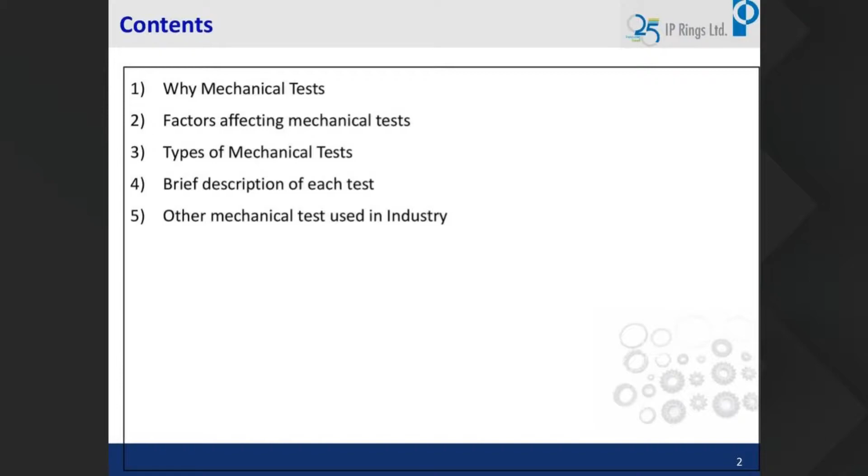Then, what are the factors that affect mechanical tests? What are the types of mechanical tests we have, description of each test, and also the other mechanical tests that are commonly used in the industries.

So if you see in the new product development stage, we will be getting some drawings with conventional materials, and also some drawings for new requirements with new material grades. When we get a new material grade at the time of development, which has not been developed so far in the organization, we will be studying in depth the mechanical properties of the material, to ensure whether the final product that goes to the customer meets the requirement, and also to ensure that if there's any failure in the process, which I will cover in future slides.

So the basic requirement is the mechanical testing. Then comes the metallurgy, the microstructure, and other things. From the mechanical tests, you can arrive at certain conclusions on how the material is behaving.

Then, once the material has been developed, when you are productionizing in regular production, there's one thing called incoming inspection. In any industry, we have incoming inspection, especially for raw material. Once the raw material input is good, naturally the output product quality will be better. So that is why in all industries we institute incoming raw material quality inspection.

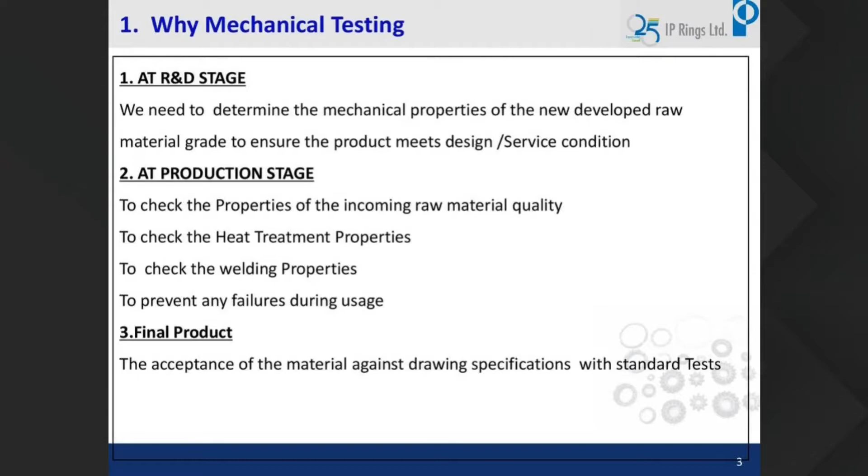In order to evaluate whether the final product is meeting these requirements, it is a must that the drawing mentions the coating thickness and mechanical properties of the coating like hardness. This is mandatory to be spelled out in the drawing, and we also have to provide the test certificate to the customer. Nowadays it is becoming mandatory that without doing any mechanical testing, the product cannot go to the customer.

Hello, yeah. Are you able to hear me? Clear here madam, no problem. Okay, because Vadivel is not able to hear. Can I proceed? Yes ma'am, please proceed.

The various types of material testing: we have two types, destructive as well as non-destructive. In destructive testing, the basic one I told you is the hardness requirement, where some indentation is formed, which again the customer will not accept. Tensile testing of course involves breaking, there will be a breakage in the sample specimen. And the impact test also involves breakage.

So all this falls under destructive testing. Some of the non-destructive testings are MPI, dye penetrant, eddy current, and radiography.

Non-destructive testing: at IP Rings, we manufacture piston rings as well as differential transmission gears. For transmission gears, non-destructive testing is mandatory because after heat treatment, transmission gears, which are usually low carbon steels that are case hardened, need to be checked. MPI and eddy current testing are facilities we have in-house.

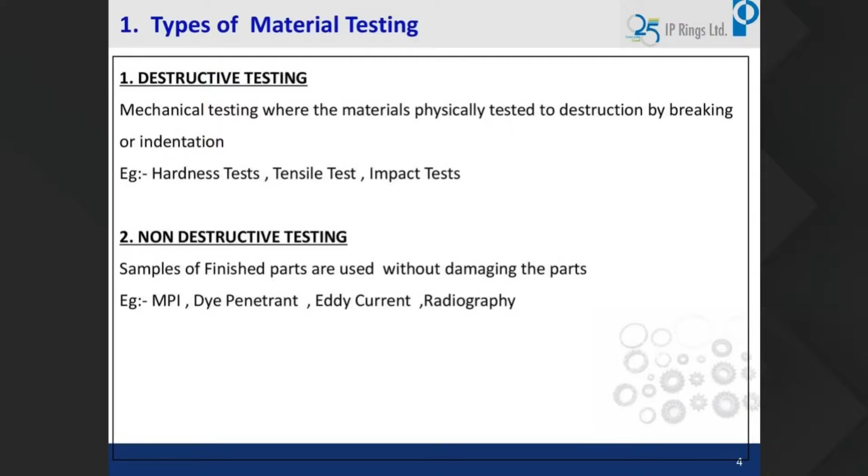Next, what are the factors that affect mechanical properties? One factor is the chemical composition of the material. The chemistry plays a major role, and also the bonding—whether covalent or ionic bond—also plays a major role in determining the mechanical property, along with the crystal structure.

Looking at crystal structure, whether BCC or FCC—for differential gears, we procure hot rolled bar from the steel mill Vardhman. In the hot rolled condition, the microstructure will be ferrite and pearlite. Once case hardening is done at the end of product formation, the microstructure converts from ferrite-pearlite into martensitic structure, which is body centered tetragonal (BCT). Based on that microstructure, there's a difference in mechanical properties.

Apart from that, the extrinsic factors are sample geometry, sample preparation, and machine equipment. All machines nowadays have to be calibrated before use, whether we are using a simple hardness test. Every day we do calibration. At IP Rings, we have instituted a chart, and every day our operators or inspectors check it as a standard practice.

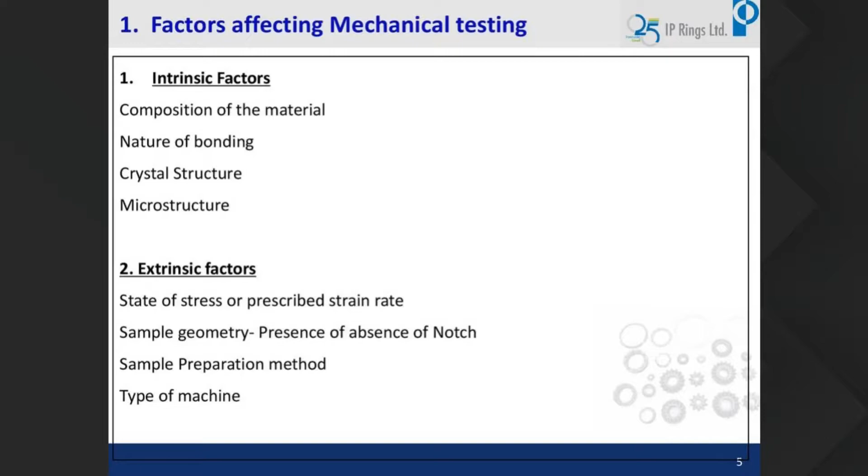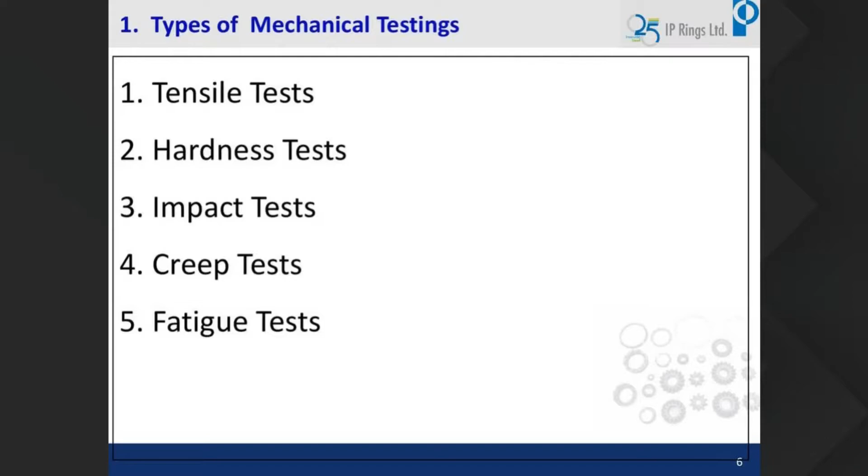Next, some types of mechanical testing are tensile test, hardness test, impact, creep, and fatigue. I will touch upon only tensile, hardness, impact, and fatigue, because creep is for high temperature products like titanium, which we don't generally use in our industry. So I'll mostly cover tensile and hardness, and we mainly use hardness and fatigue testing. Apart from that, there are other simple tests we do in our factory which I'll share.

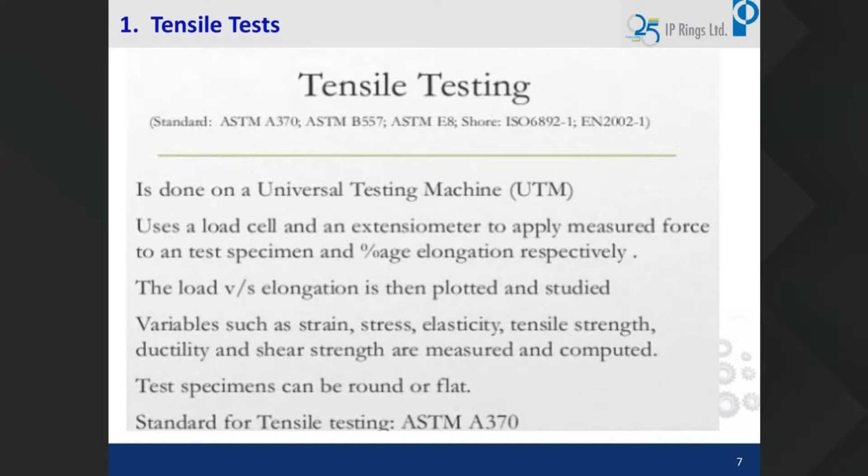Next, the theoretical part. When we talk about tensile testing, the basic thing that comes to mind is the stress-strain graph, and how strain is measured with the help of an extensometer, with the graph plotted accordingly. There is a standard specimen requirement as per ASTM or IS standards, and the specimen is prepared based on that. The properties we get from tensile graphs are ultimate tensile strength, ductility, elasticity, stiffness, malleability, and modulus of resilience.

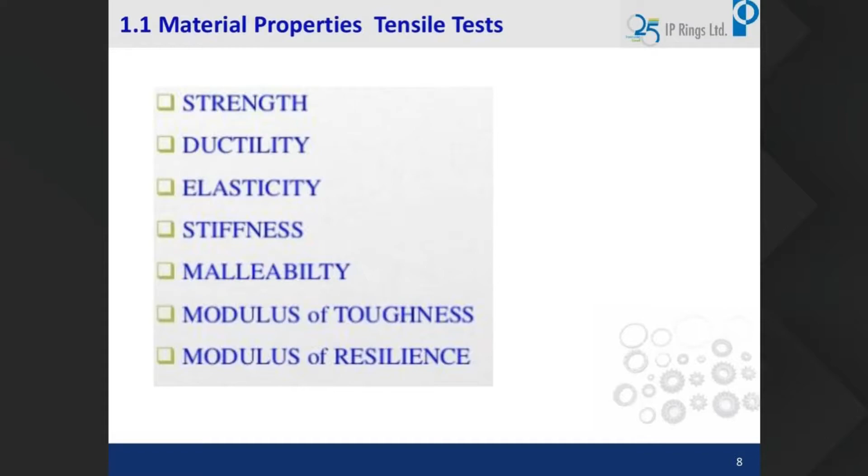Generally, in our manufacturing standards, we mainly check these properties for piston ring wire as well as hot rolled bar. For hot rolled bar, we are mostly interested in ductility and tensile strength. For piston rings, we also calculate tensile strength, which I'll explain in subsequent slides. We don't have this facility in-house for checking hot rolled bar, so we outsource that material for checking.

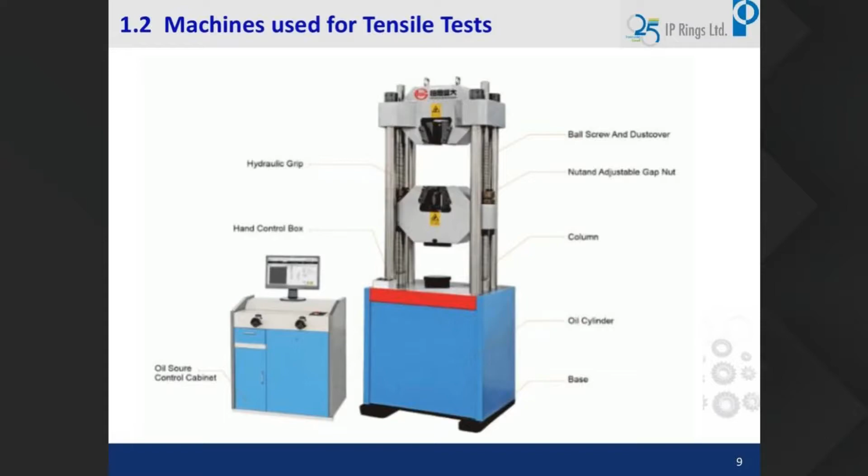One more thing is, generally, if you see the specimen in the hot roll bar, the microstructure will be ferrite and pearlite. But the final product, what we are dispatching, will be the case hardened product. So when we are producing these sample test specimens, it is also mandatory that the specimen undergo some hardening treatment so that we get the value defined in our standards.

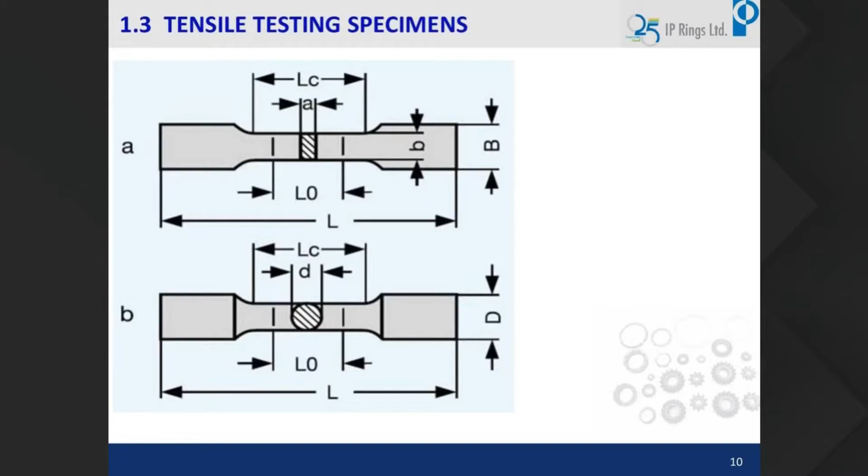In the elastic region, we cannot do anything, so we have to go beyond the yield point for permanent deformation. It is mandatory to know the yield point, the plastic deformation zone, and the fracture point, because when cold forming in the presses, we should know to what extent we have to give the force. Otherwise, the force should not reach near the ultimate tensile strength, or it should not be below the yield point, otherwise the product will not have sufficient filling and other issues. That's the reason for differential gear application, the tensile strength checking is mandatory.

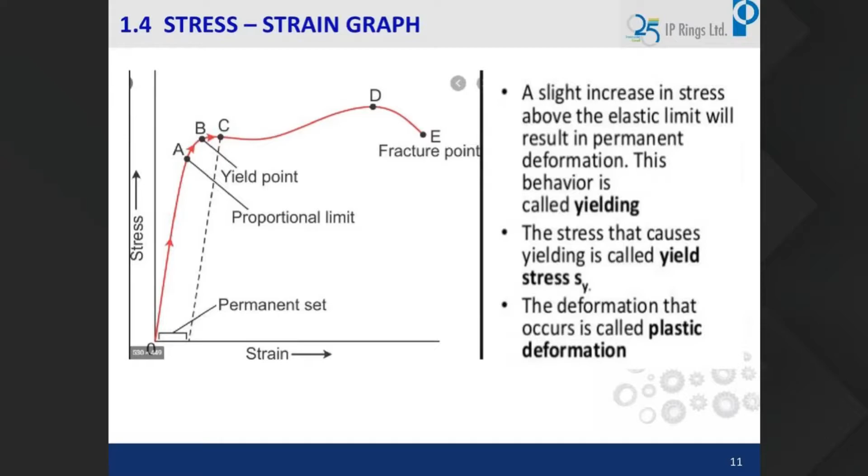Especially in IP Rings, in any commercial vehicles or passenger cars, in the automobile engine we have 3-cylinder or 4-cylinder engines, and in that we have 3 rings: top ring, second ring, and the oil ring. Top ring is always steel, second ring will be mostly cast iron rings. Cast iron rings are very brittle, that is the reason I have shared this.

We also check the tensile strength of the cast iron and the modulus of elasticity of the cast iron. These are all some of the basic requirements.

From the fracture, we will also know whether it is a brittle fracture. From the tensile specimen fracture, we will be able to know whether it is brittle or ductile. Apart from ductile and brittle, we have other fractures also: fatigue fracture, creep fracture, or fracture due to corrosion. If you see in fatigue fracture, there will be beach marks.

If you see in the ductile fracture, there will be a cup and cone type of display in the fracture. So from the fracture study itself, we will know whether the material has failed due to ductile or due to brittle failure.

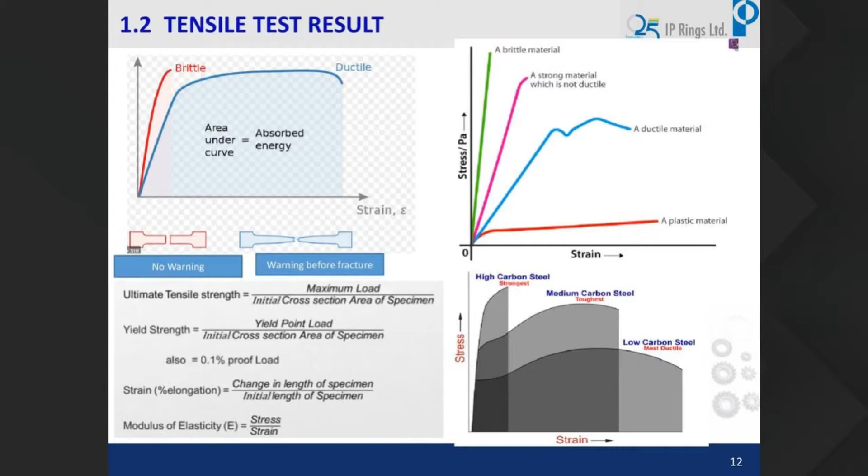One more thing is why these 3 parameters alone are mentioned: the ultimate tensile strength and elongation percentage reveals the ductility of the material, which is most important when doing cold forming application. And the impact - generally in the differential gear, the impact load will be more, so we have to evaluate the impact of the materials, whether it is meeting the requirement, in order to prevent any service failures. So this is a mandatory check.

We don't have in-house facility for checking the tensile strength of the hot rolled bar. This we outsource to external labs like Micro Lab or Omega or Chennai Metco.

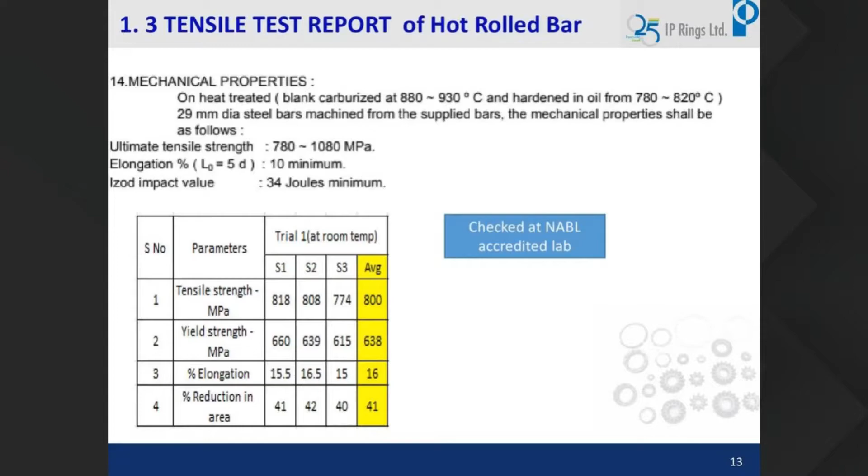This is one of the nitralloys which most steel mills have not developed. In the rotor pump shaft, there are a lot of micro drillings, so to enable that, this nitralloy is also treated with some lead, which helps machining. Whenever we receive batch to batch, there is a lot of variation. This steel was supplied by RL Steels, and it is leaded steel.

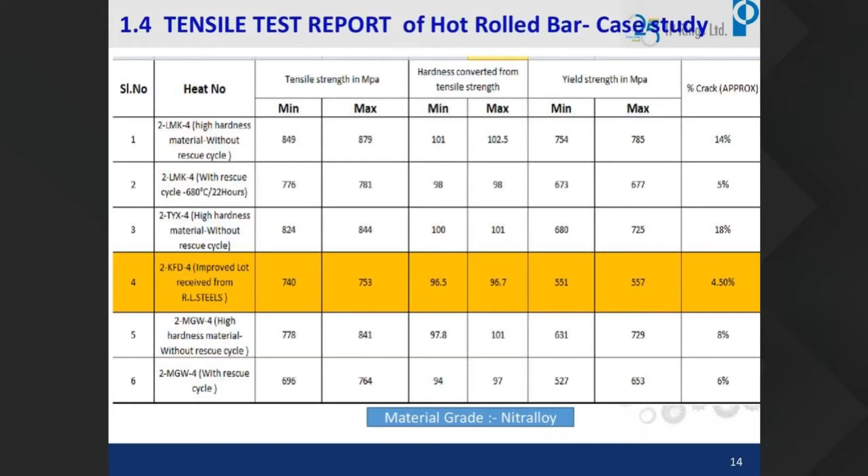If you see the piston ring, I have shared in the next slide the test certificate from the Hitachi mill. They have mentioned the size of the wire, some 2.5 into 1.5, which gives the area of the cross section of the wire. The tensile strength they checked reads around 1400 something. The specification we have mentioned is 1200 Newton per millimeter square as the minimum required.

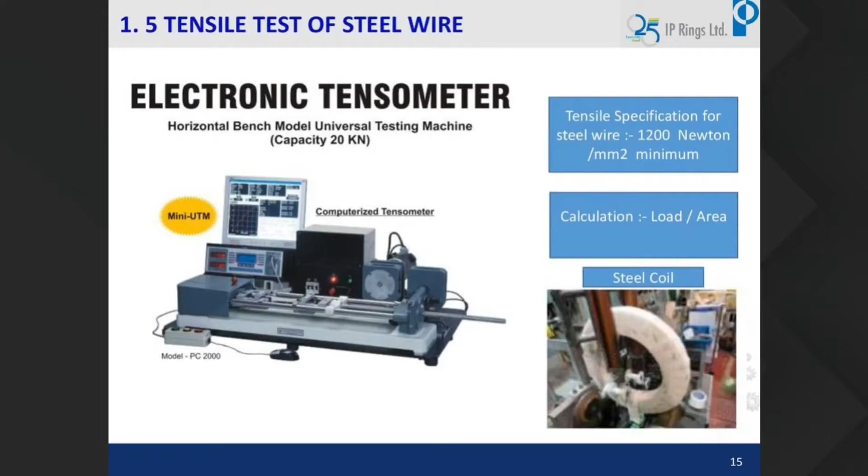So this is how we get the test certificate for each and every incoming raw material, whether it is steel mill, steel wire, or hot roll bar. This is a mandatory requirement, and in any customer audits, first they check these test certificates supplied by the steel mill, and only after that do they see our verified results. Then they correlate, and there should not be a huge difference between the supplier's testing and our testing. These are some of the requirements of the customer, and raw material standards are becoming more stringent day to day.

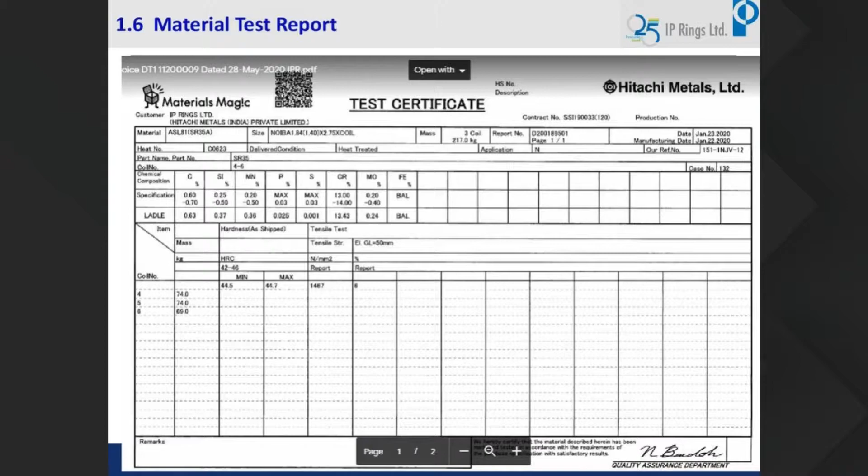The requirement is becoming very stringent, and we are supposed to share the raw material test report till the warranty period. Now it is becoming one of the customer specific requirements. Some customers insist that we maintain this till the program runs, for 10 or 15 years.

I told you that in the piston ring, the second ring is cast iron. For checking the tensile strength of the cast iron piston ring blank, this is a tailor-made, very old equipment which our parent company India Pistons has. Here we hang the piston ring loosely, and load is applied. From the breaking load, we get parameters like close diameter, width, radial thickness, tangential load, and close gap. These are the mandatory, critical parameters of the piston ring.

From this we calculate tensile strength as well as the En value, which is a requirement of the material. At the bottommost here we have mentioned IP 4T. If you take this IP 4T standard, it gives us the chemical composition, hardness, as well as the En value and tensile strength.

From the tensile strength, we can also calculate bending strength. The formula for calculating bending strength is 2.16 times the tensile strength. This is the standard formula, applicable for rectangular sections.

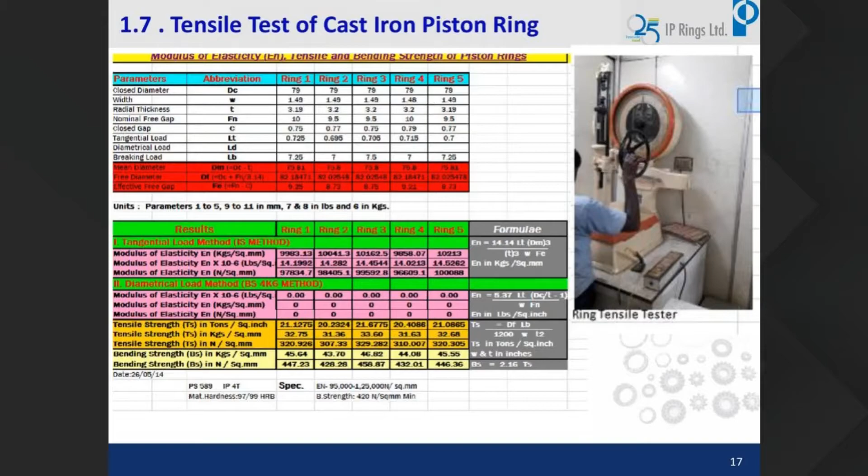Next is the hardness test, which is very simple and easy to detect any issues in our heat treatment or raw material. In the incoming material inspection also, whether it is a hot rolled bar or a steel wire, it's mandatory to check the hardness. Why is it mandatory?

For the piston ring, the wires we get subsequently have to be coiled. So if the hardness is not as per the requirement or specification mentioned in the standard, what will happen in the subsequent coiling process is that it may break. That's a mandatory requirement.

We have to check this piston ring material for hardness as well as tensile strength. As far as the hot rolled bar is concerned, the hardness will be around a certain level—that is also a basic requirement.

Here we do the next process, which is billet sawing. So up to 260 BHN is generally the maximum hot rolled bar hardness we get in the incoming material. This is sufficient for the sawing process. If it goes more than 300 or so, the sawing process becomes difficult.

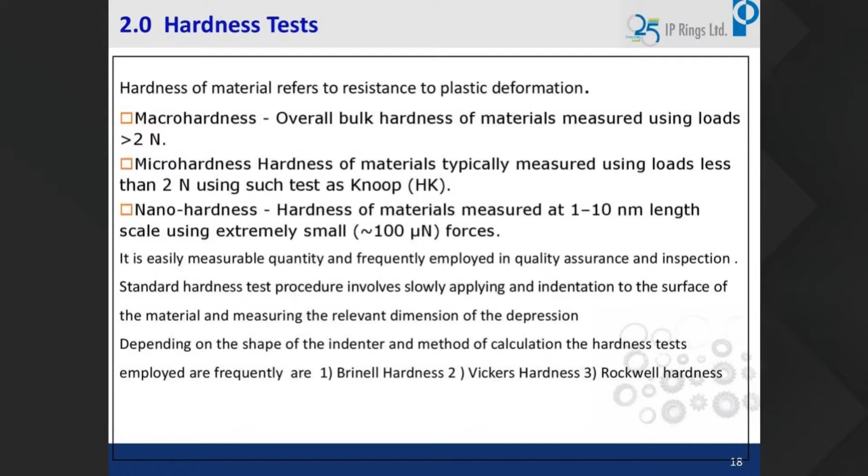We don't have this nano hardness facility in-house at present, so we outsource it to Induston at Thiruvananthapuram, an external checking source that supports us for checking nano hardness. For micro hardness, we use either Knoop or Vickers. For macro level testing, we generally use BHN or Rockwell hardness, with Brinell giving the macro level indication of hardness. Then we go for Vickers if required, then Rockwell.

Rockwell is the simplest technique and does not require any skilled operator. This is a mandatory technique after heat treatment. In case we find any deviation in hardness, with the help of this simple Rockwell hardness tester, we do 100% segregation, and sometimes the customer insists on 100% inspection of the final product before dispatching it.

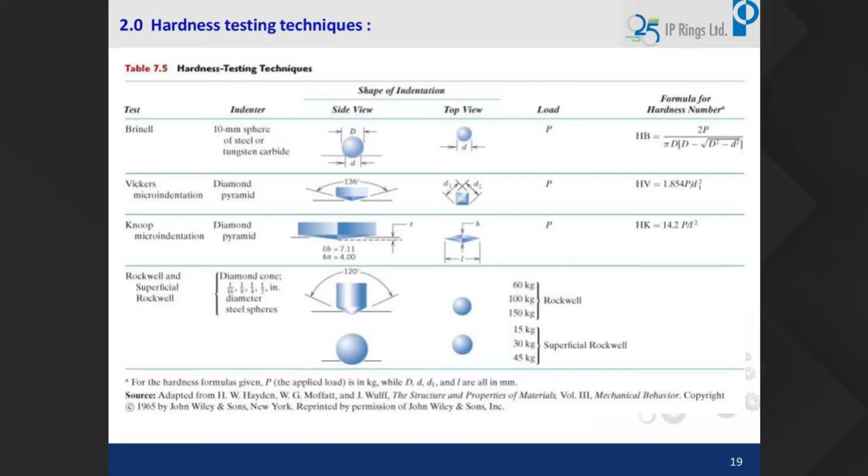These are some of the Brinell hardness testers available in the market, made by Crystal. Now we have a fully automatic one, around 10 lakhs. In olden days, we did not have the fully automatic Brinell hardness tester.

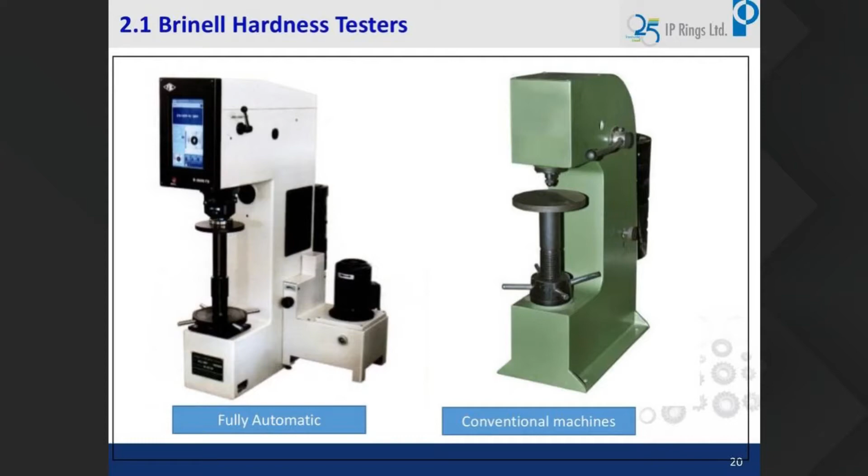What we used to do is take the indentation, then use a microscope to measure it, and compare it with a chart. Now it is not like that—everything is displayed on the screen, and it directly gives the reading.

So this is the formula we use, applicable for both ferrous and non-ferrous materials. For ferrous, we use loads of 187.5, 750, as well as 3000 kg, whereas for non-ferrous we use 500 to 1500 kg. The Brinell hardness number is indicated by the abbreviation BHN or HB, and HB is what is indicated in the drawings and other documents.

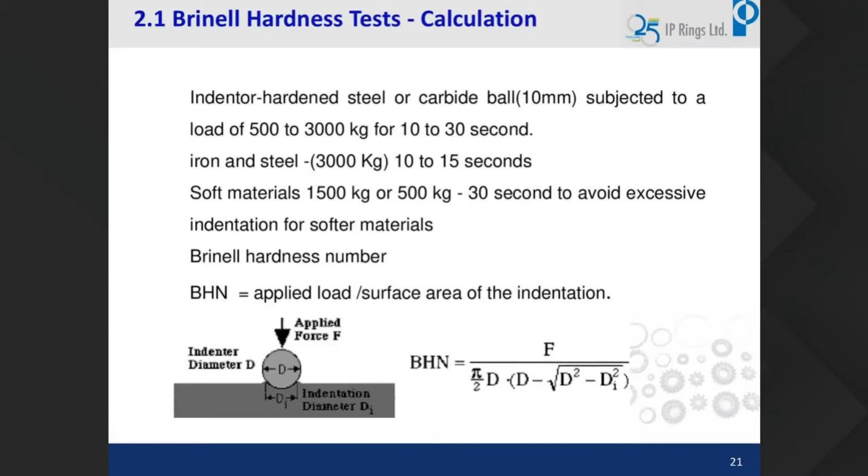So for the basic requirement for ferrous material, the load by D square, that should be 30. It should be 30, only then we can use it. So we have to select the indenter accordingly. Generally 10 mm ball, 2.5 or 5 mm ball. This is the standard balls which we use for checking the Brinell hardness test, for measuring the hardness requirement.

Generally, if you see all the heat treated parts, in our differential gear manufacturing, in between process, prior to the cold forming application, the material has to be softened. So for that we subject the parts to a heat treatment process called annealing. In that, the basic thing is we heat to a certain temperature and then cool it in the furnace, so as to soften the material.

So for all the soft materials we check basically using this Brinell hardness tester. It will be available right next to, close by to the furnace. It is a shop equipment where we can train the operators and make them check daily to check the in-process product quality. This equipment is basically used for that.

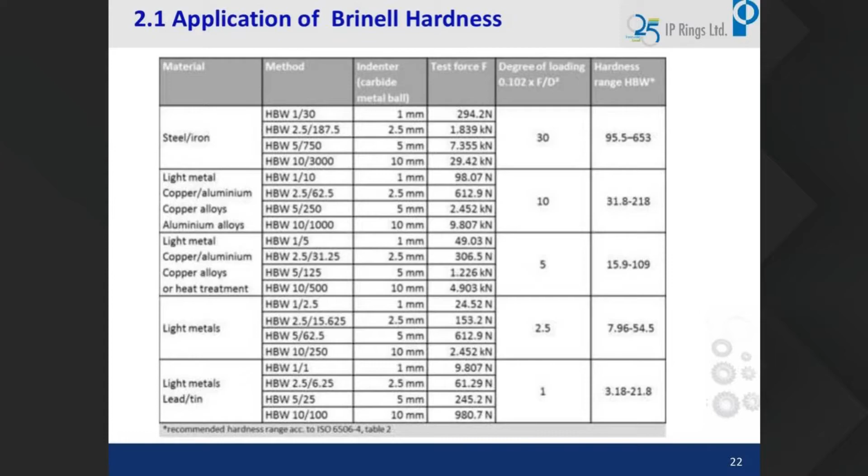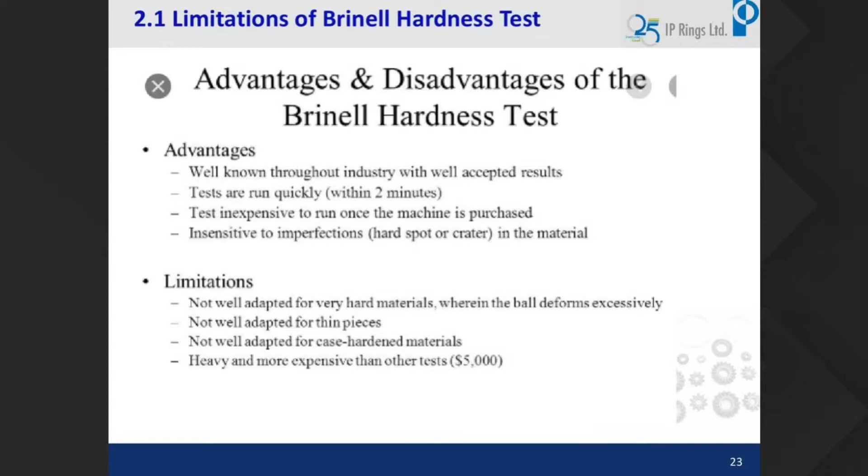Next, advantages: as I told you, this is a quick run, and the indentation will be bigger when we use 3000 kgs and all. And if you see this Brinell test, we generally don't use it for the case hardened material, and of course it is not viable for checking. Even external labs check this Brinell hardness, like Microlab and other labs, they are also capable of checking this. They cost around some 1000 to 2000 rupees for the charge.

We have the in-house facility. This in-house facility we use for checking the annealed, softened part, which I told you is one of the process requirements for manufacturing the gear parts.

Next comes the Rockwell hardness tester. It is as the picture here itself is self-explanatory. First, we apply a minor load. In the minor load, we have two different types: 10 kg and 3 kg. If it is 10 kg, it is ordinary Rockwell hardness. If it is 3 kg, we call it the superficial Rockwell hardness tester.

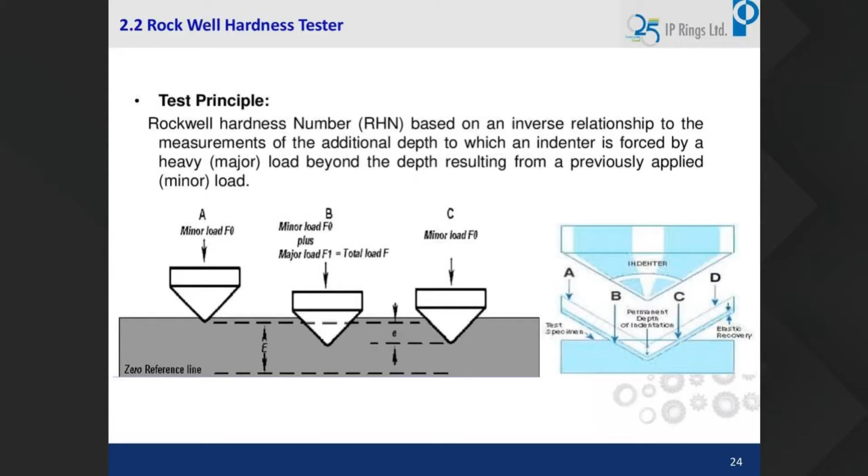And we have loads of 60 kg, 100 kg, like that. We have 100 kg and 150 kg for Rockwell. And for superficial, the minor load is 3 kg and we can use 15, 30, or 45 kg.

Mostly this Rockwell is used for testing the final product or annealed parts. Also you can check where the surface area is very small. And where we cannot use the Brinell hardness, we can use the Rockwell hardness there as a tool for checking. And for the superficial hardness, generally we check for the piston ring steel wires. Steel wire is a requirement. Either they give it in HRC or they give it in superficial hardness like HR 15, 30, 45.

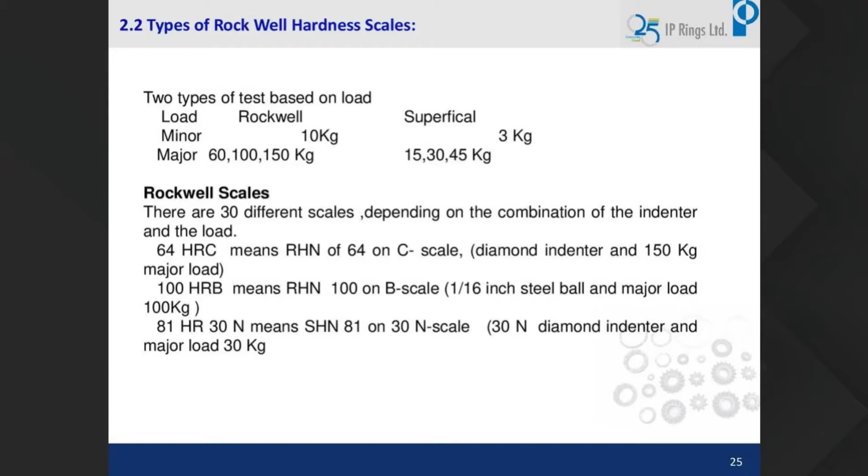Here also you have N scale and T scale. If you are using the diamond indenter, it is the N scale, and if you are using the ball indenter, 1/16 inch ball, it is called the T scale. So there are many applications, more than 30 different scales are available. With this combination of loads we can use it. We can also check both ferrous and non-ferrous material using the Rockwell hardness tester.

This is again repeated, the slide is repeated. So this Rockwell nowadays, earlier we had a manual type of checking the Rockwell hardness, where even in the manual type, the dial gauge will give directly whether it is HRC or HRB, that is in the B scale, C scale, or A scale. The dial gauge will directly give the reading.

Now we have more sophisticated equipment where we get the reading digitally. We get it in 0.5, 74.5 or 80.5 or 80.1, we get it in decimals. Now it is possible. We have, in IP Rings, one digital Rockwell hardness tester.

And as I told you, the indenter is diamond. The main thing in this Rockwell hardness is the tip. The tip has to always be 120 degrees. Otherwise, if this tip gets damaged, it has to be frequently verified for any damage. Otherwise it gives an erratic reading. So generally we train the operators in all our SOPs.

We make it a point that the tip is always checked at a set frequency, and it is noted so that if there's any damage or such issues, we can replace it periodically.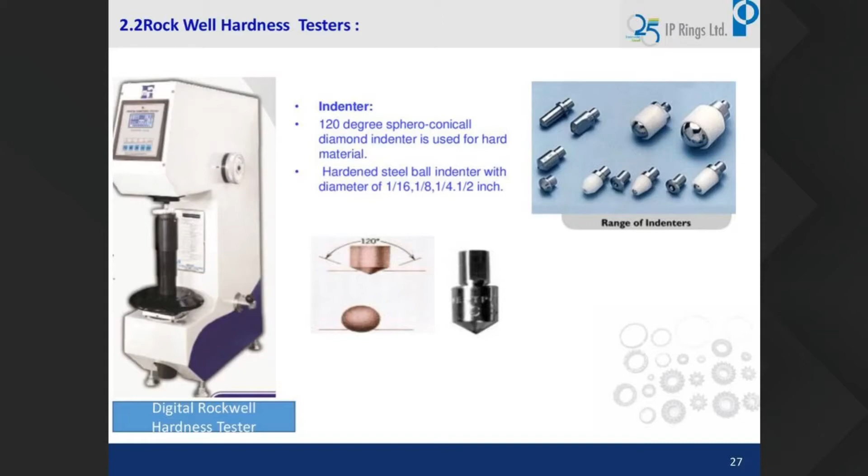So in that case, for shallow case depth, the standard handbook recommends using the HRA scale, whereas for higher case depth, the standard recommends using HRC. That is the requirement.

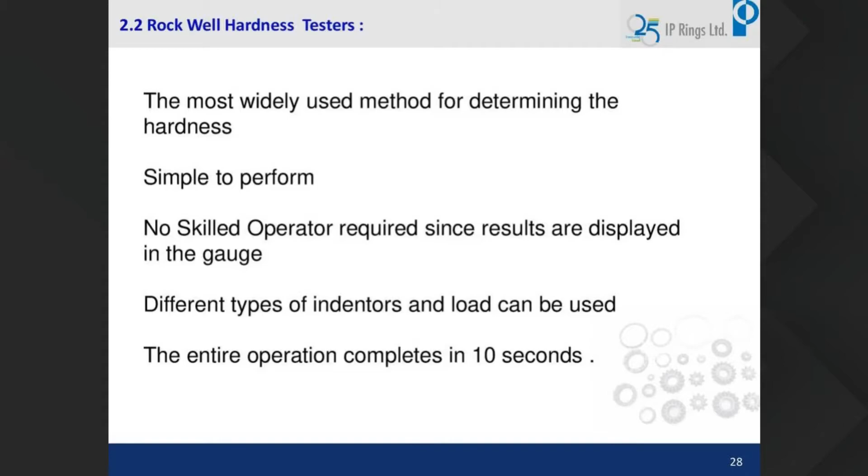This is a simple process, as I told you - no skilled operator is required, and the entire operation completes in a few seconds. We can do 100% inspection also using this Rockwell hardness tester. Next comes the micro Vickers.

For micro Vickers, at IP Rings we have two testers. One ranges from 10 grams to 10 kg, and another from 2 grams to 2 kg. These are the two hardness testers we have.

Generally, this micro Vickers hardness is used because at IP Rings we do many surface treatment products. As I told you, the top ring is subjected to very high temperature and corrosion, so the piston ring top ring undergoes surface treatment like molybdenum coating, gas nitriding, PVD coating, or DLC, which is the latest technique. PVD nitrided DLC is also available, and a combination of any two coatings is possible, or chrome plating. These are some of the surface engineering facilities we have in-house.

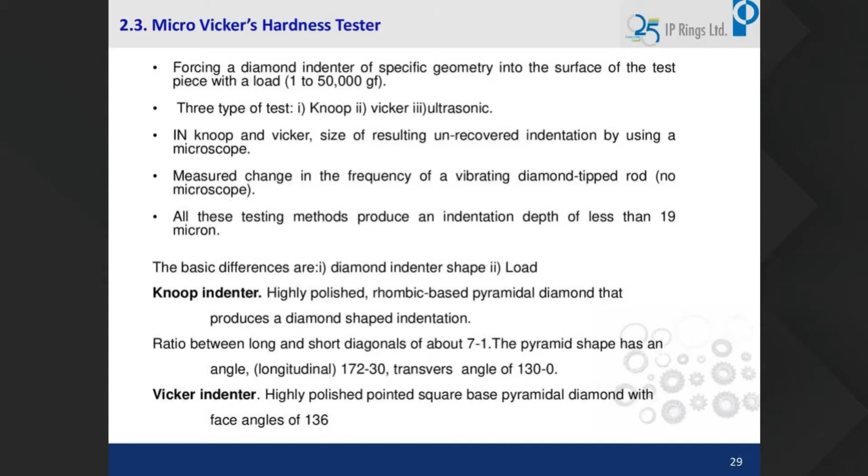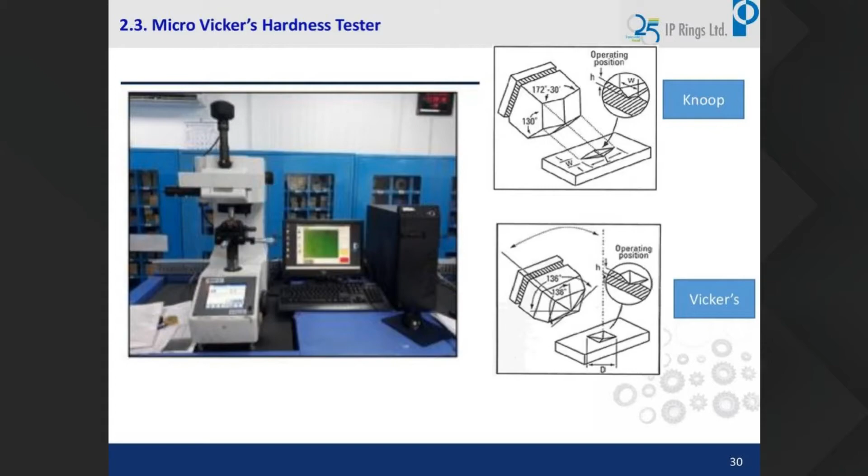It has become mandatory for us to check this in our incoming inspection process. This is a photograph of our lab equipment, shown here on the left side. Generally we don't use Knoop, but for our products - whether piston ring or differential gears - we mostly use this because we don't use Knoop; it was basically just a difference in the indenter.

Application-wise, this is used for evaluating case depth. When you do a case hardening process, for piston ring application I told you we do nitriding, and for differential gears we do case hardening. Some parts we through harden or induction harden - some synchrocone products we manufacture are induction hardened. So to what depth the carbon has diffused, we can determine using this Vickers hardness testing.

What we do is prepare a mold specimen and take indentations from the surface up to a certain depth, and there is a cutoff for differential gears. For case hardened parts it is 50 HRC, whereas for nitrided parts it is around 700 HV - that is the cutoff. So we calculate the effective case depth with the help of this micro Vickers tester.

Also, in the JIS standard evaluation of decarburization, one approach is to section the product, prepare the metallographic specimen, and check the microstructure. With the help of the microstructure, we are able to evaluate the decarb.

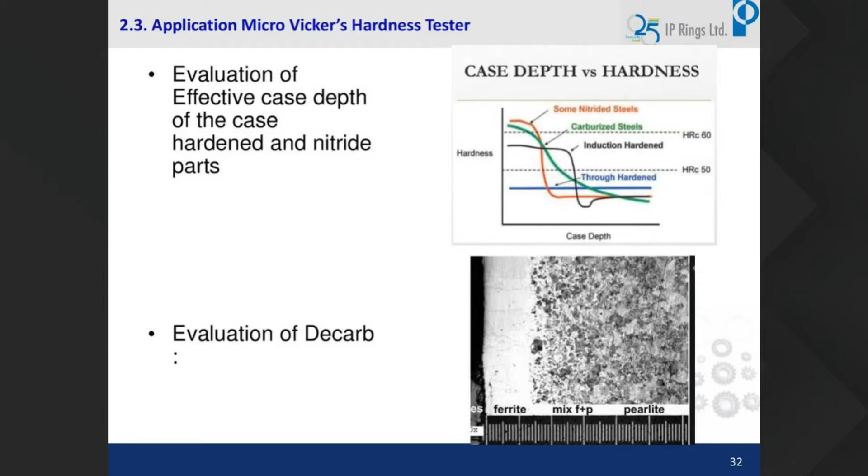Periodically, we have an annealing furnace, and periodically we do this decarb evaluation for correcting the furnace. Also, if there are any leakages or anything, this will indirectly tell us.

Then this is bond strength. Just now you saw the pictures, but I have a case study which I'll explain at the end of the session. In this bond strength, this is the substrate material and this is the coating. In between there's a thin line which is pure chromium coating. If you put an indentation, there should not be any crack running like this. If there is a crack, the bond is not intact, which we call a boundary crack.

Basically in any coating or surface engineering, other than case hardening and nitriding, all the bonds are only mechanical. There's no metallurgical bond other than case hardening and nitriding. Only in case hardening and nitriding do we have a metallurgical bond, whereas in molybdenum or chromium plating or PVD coating - this is a photograph.

What I showed you is a PVD coated piston ring. This is a PVD coating material, and this is the substrate. We use this as a tool for evaluating the bond strength.

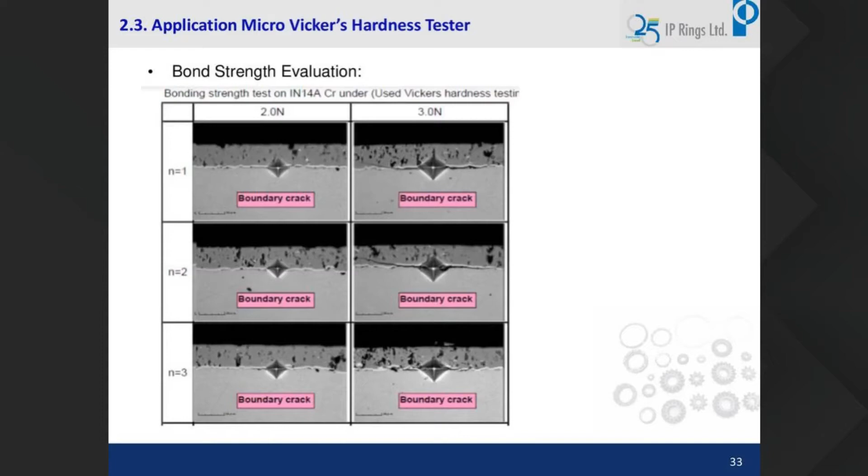Next, as I told you, in the incoming process, if you see in our control plans what we give for manufacturing - in the after coating stage, it is mandatory for us to check the hardness and the depth of the coating. So we use micro Vickers hardness testers for doing such inspections.

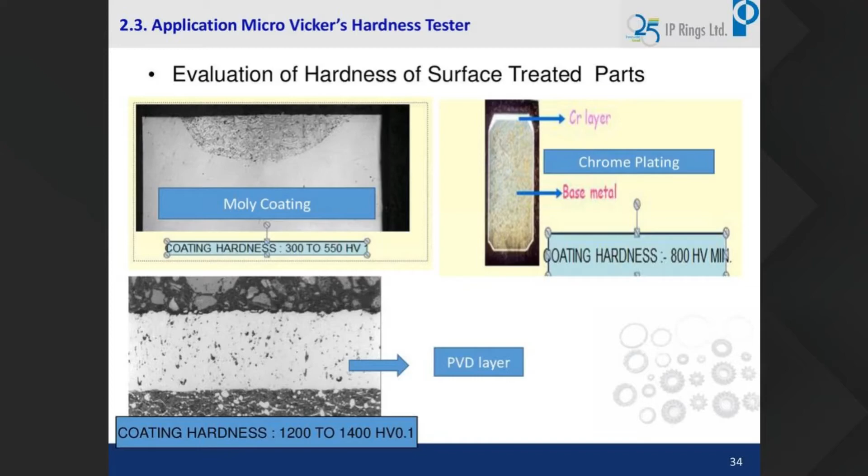So this is a chromium plated ring, all over chromium plated. The minimum requirement for hard chrome plating, and the minimum requirement of the coating, is 800 HV. This is a PVD coated ring, magnified and shown - the requirement of this coating is 1200 to 1400 HV. And of course the moly coating, which is phasing out slowly, is 300 to 550 HV.

So next is the impact test. As I told you, for the product we are manufacturing, the differential gears, the impact requirement is very important, because the end product, the transmission gears, are subjected to very high load. So in that case, for the incoming raw material, we subject it to some blank heat treatment, and then we check the material.

Here also I have many examples. If you see, the impact strength will vary from oil to oil. We have made many studies. In heat treatment, each supplier will have his own oils developed by him, so in some of these oils we won't be getting this. Supposing we go for salt bath, the impact will be slightly lower compared to the oil we are using.

So by this way we can judge where we have to use salt, or where we have to use oil, or how to improve the mechanical properties in the salt. In that case, what we will be doing is slightly tinkering with the hardenability elements like molybdenum, chromium, or manganese to achieve the property that is required in oil.

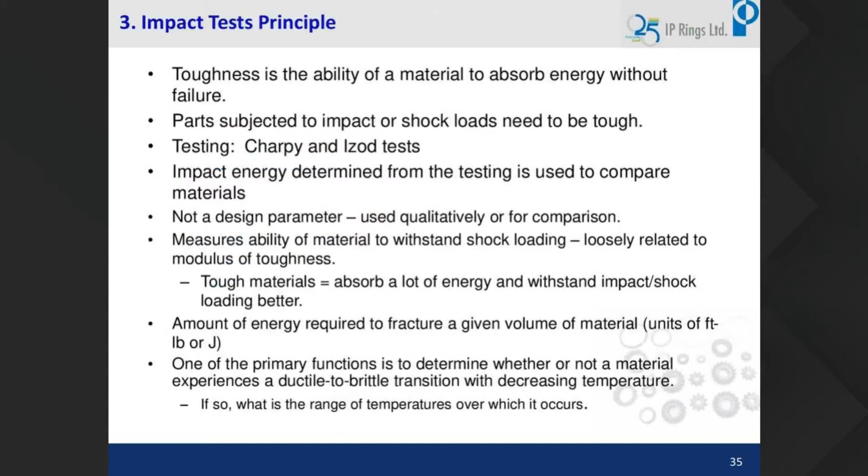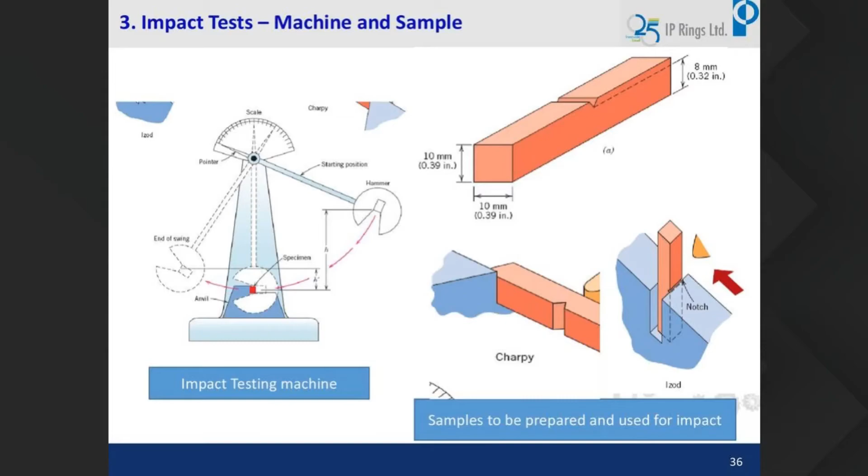In the slide which I showed you earlier, which I shared, the requirement was IZOD. Some of the JIS material like SCM 420, the requirement is Charpy. In this also you have U notch and V notch. So this is the mandatory requirement to see that the product does not fail in service.

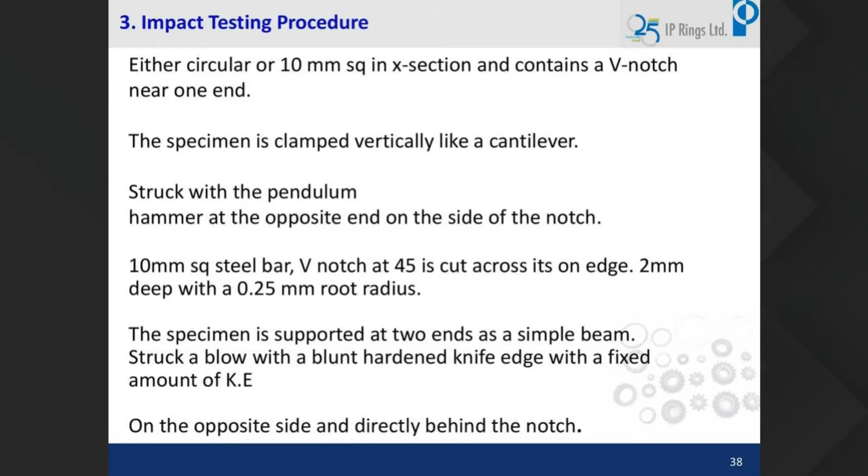So these are the procedures, some of the procedures, how it is being operated. This is what I have explained. Next comes the functional test.

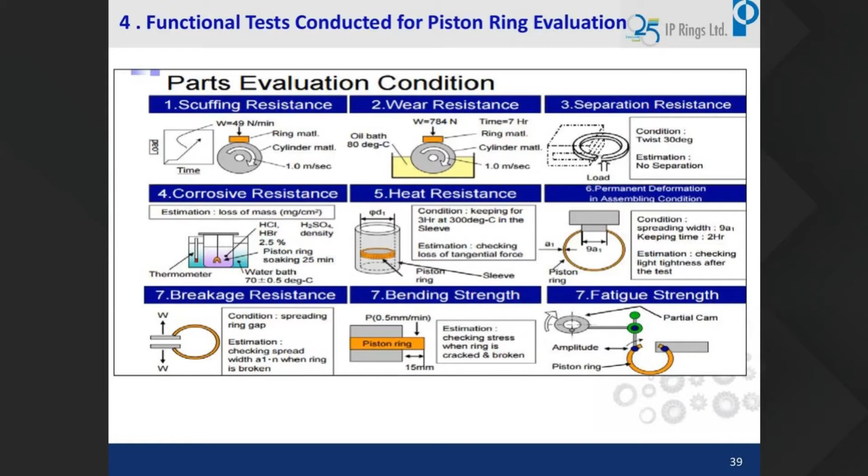So far I have covered the mechanical strength, mechanical properties. Apart from this, some of the tests for piston ring application, what we call function tests, we use is scuffing, wear, separation resistance, corrosive, heat resistance, permanent deformation, braking resistance, bending strength, fatigue strength. This fatigue strength I will cover. Other tests mostly will not be covered in mechanical testing, but this fatigue test will be covered under mechanical testing, which I have shown next.

This, I have a case study which I'll show. When there was a phase change from BS4 to BS6, we had to supply to Tata Motors for an engine application. At that time, when it was in the BS4 stage, the ring thickness was around 2 mm, and when it changed over to BS6 phase, the designer suggested 1 mm. That's the design of the customer, and it has been reduced to 1 mm. But there were no changes in the process.

What happened is during the test, it was developed and sent to the customer for testing. During testing, out of some 20 engine tests, we found that a few parts, like a few engine sets, the top ring broke and it failed. When we made a deeper analysis, we asked why such failure was happening only in BS6 when compared to BS4.

Then we came to know that in BS6 application the thickness is reduced, but the pattern- generally we do a gas nitriding process, we call it a pattern or recipe- the recipe earlier was 84 microns, that remained the same. Also, we have a collaboration with Nippon Piston Rings Japan, and our collaborator is recommending- this is the cross section of the piston ring, this is the nitrated layer, on top of it is PVD coated. If you see in the corners, what our collaborator recommends is the GN depth should be as minimal as possible, less than 50 microns or close to around 50.

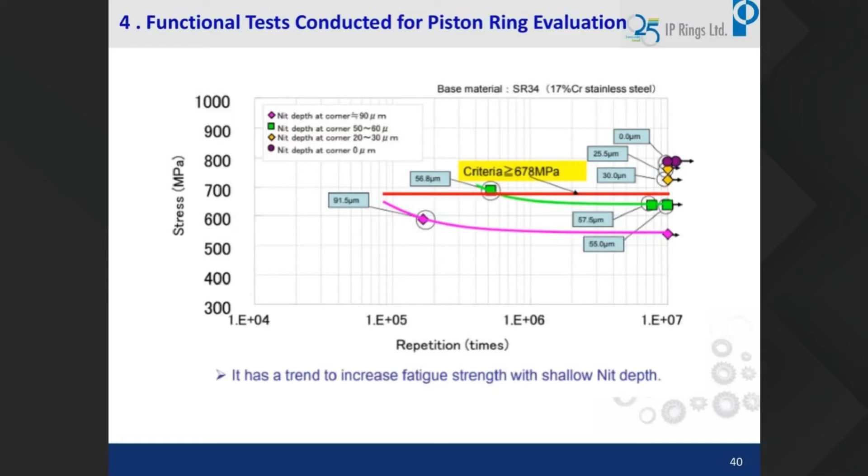Whereas when we reduce the diffusion or coating, diffused thickness, nitrated thickness, to around 30 or something, it is meeting the requirements. So what we did is we introduced an operation in the corner, we reduced the cycle time, the diffusion time from 7.5 hours to 4 hours. We also added one additional process, what we call corner grinding, where we removed some of the nitrated portion from the corners, and then after that we coated.

Subsequently, we sent these parts for fatigue testing. We don't have the facility at IP Rings, so we are dependent on our collaborator. We saw an improvement of 100 MPa, which was eye-opening for us. As we are moving to BS6, there is a stringent dynamic clearance requirement that has been reduced, so naturally we have to make process changes, otherwise we will not be able to achieve the customer's requirement. We made this improvement and presented this slide to the customer, and now the product is running successfully with no issues. The customer is also very happy about it.

So what happened is, if there is higher GN depth, the brittleness is more. When we reduced the GN depth, we improved the ductility of the material, and that is enough. For engines generally, nitriding does not play a major role, the PVD alone plays the major role on the periphery. This will be in contact with the mating liner cylinder. Naturally, if it runs lakhs and lakhs of kilometers, the wear occurs - this is a PVD very hard coating, 1200 to 1400 HV. The wear will be around 5 to 6 microns, so till the end of life it may not reach the nitrided layer. The nitrided layer is given as a supporting layer - in case there's any flake off or chip off, this nitriding layer will support throughout the cycle. That is the reason we do nitriding.

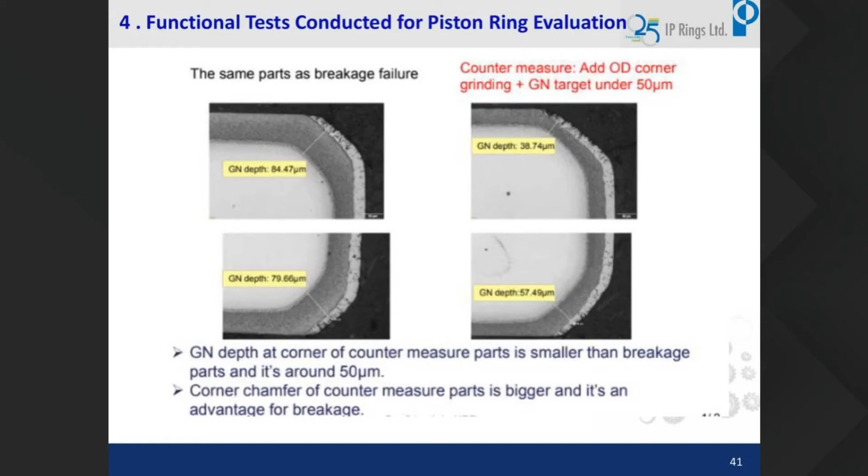Then we learned that for GN nitriding with GN PVD, the nitriding depth requirement is something less than 50 microns. From then onwards, we changed our product drawings, and we recommended that whenever there's GN PVD, it has to be less than 50 microns. Another test we use for checking the adhesion is the bond test I mentioned in my earlier slides, where we put an indentation - micro Vickers indentation at 200 kgs and 300 kgs - at the interface of the coating and substrate, and check whether there is a crack.

Similarly, we have what's called a scratch test. The scratch test uses a diamond indenter. We don't have this facility in-house, but it can be outsourced. This is the famous test the Germans call the Rockwell test - this has been checked by our collaborator. I have one more case study for explaining this scratch test also.

In one of our projects, a Volkswagen project, what happened is we did a conventional PVD - that is nitrided PVD with chromium undercoat and Ionit 14A PVD, which is chromium nitride PVD, with hardness of 1200 to 1400 HV. We manufactured the product, and there was a phase change for BS6 application. We struggled a lot, and we learned a lot during this journey.

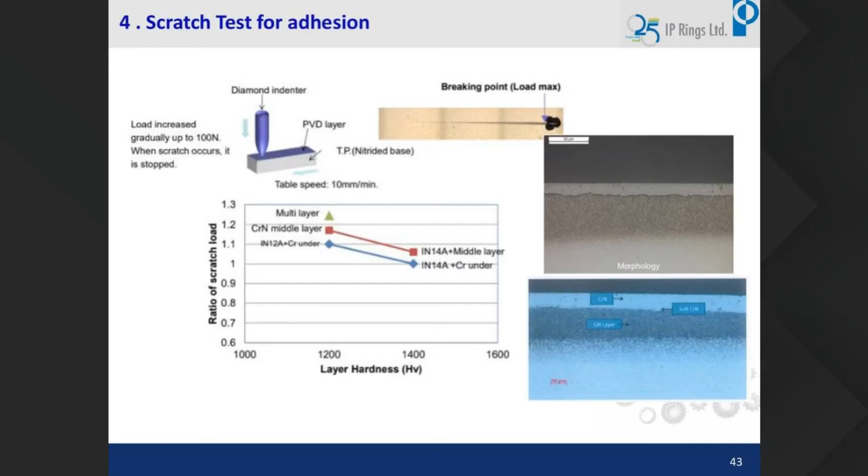This is the Ionit 14A chromium undercoat, and this is the middle layer we call chromium nitride - it is essentially chromium nitride but in a different stoichiometry. So we modified our PVD process and recipe from undercoat to middle layer, processed a few products, and this was again evaluated. The customer doesn't directly accept for testing - we gave it to our customer, who again validated the product, and once he is very confident of the product, only then will he take it, because engine testing is a very costly process.

So in order to minimize time and cost, these are some of the basic product validations required to give confidence to the customer that the product will not fail. The product was taken for testing this week, results are yet to be disclosed. This is one of the mandatory scratch tests. We do not have an in-house facility for this, but we outsource it to our Industron R&D center at Thiruvananthapuram, where they help us with this type of testing.

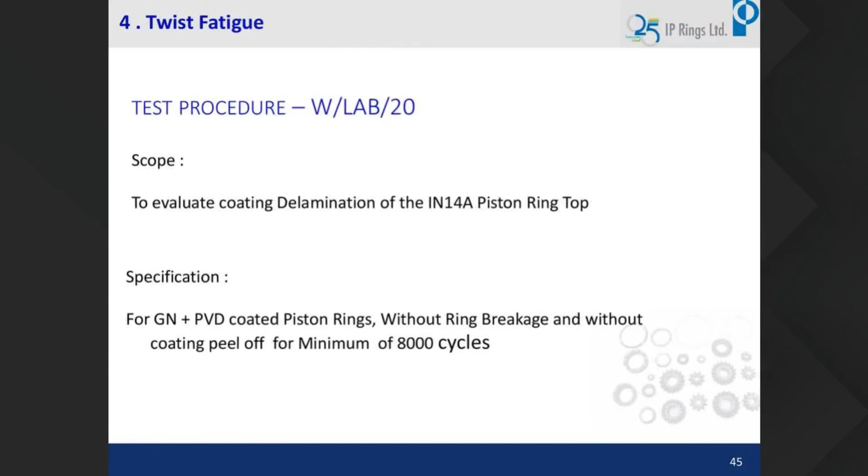One more test is the twist fatigue test. Since we do not have this in-house facility, we use mechanical bonded coatings like chromium plating, PVD coating, and molybdenum coating, which is being phased out now. All this coating, whether it is intact or not, has to be validated once a year. Since we don't have a scratch test facility, we converted a Dartec UTM machine into a twist fatigue machine. One part is stationary, the other moving, which we call the stroke length. This moves, vibrating at a frequency of about 1 to 1.1 hertz, and we check the coating in that process.

This is one of the products I mentioned that was recently taken for testing. These products were subjected to this testing. Initially when it broke, the nitriding depth was very high, and because of the higher nitriding depth causing brittleness, the ring broke. Subsequently, we changed the diffusion pattern and reduced the diffusion time from 7.5 hours to 4 hours, and then we checked the twist fatigue again.

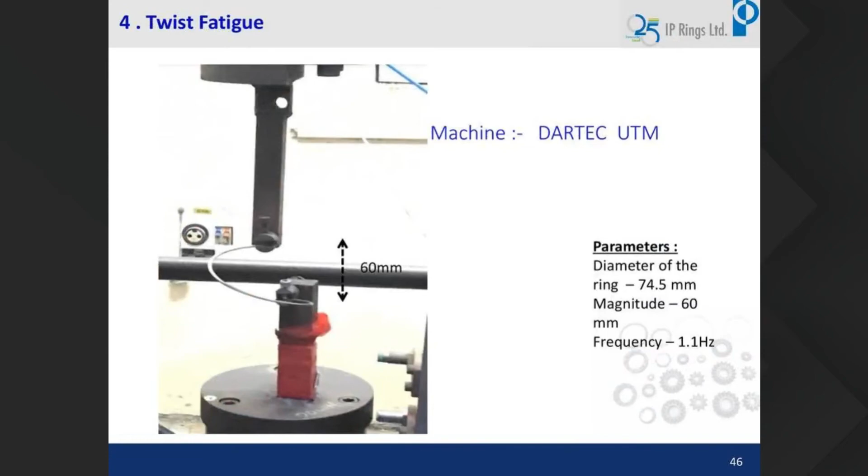There was no coating peel off and no breakage. This is the minimum cycle requirement, but we wanted to know what happens up to 50,000 cycles, as per customer requirement, to see whether it fails when we extend the cycle. So we subjected it up to 50,000 cycles and couldn't find any peel off. The tested rings, after passing the twist fatigue test, were sent to the customer for scratch test evaluation, and it passed that evaluation too.

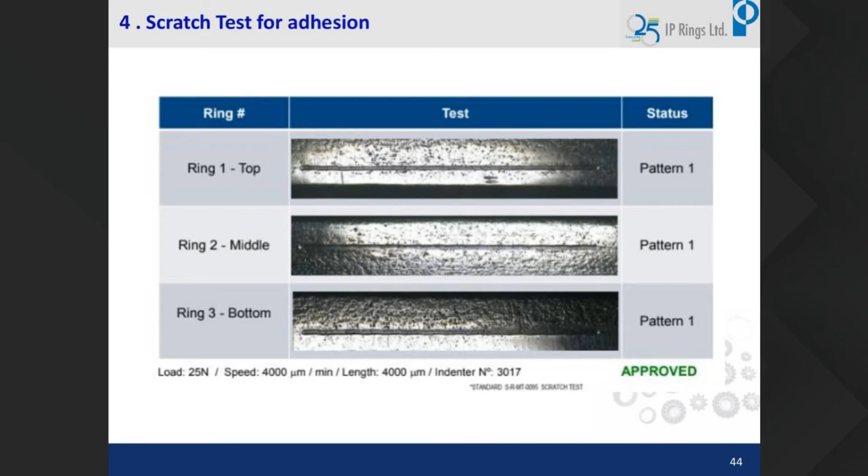These are some of the simple tests to ensure the product does not fail during service. I think this is the last slide, so with this I end my session. I hope I have shared my experience, and I hope it was useful for you all. I don't know to what extent I was able to present it to you.